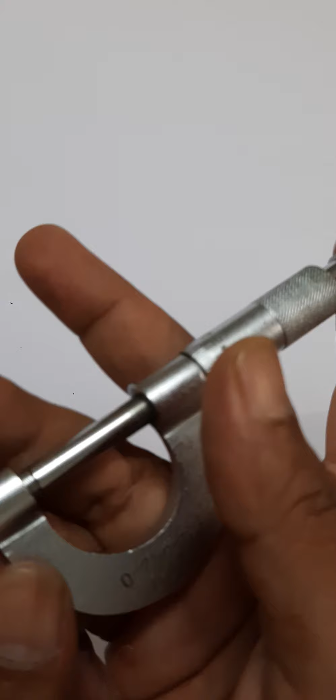This is an instrument known as the screw gauge instrument. Now you can see there is a scale which is in circular form: 0, 5, 10, 15, 20, 25, 30, 35, 40, 45, and then again 0, which means there are total 50 divisions on the circle. So this is called the circular scale of the screw gauge.

A linear scale is also present, but that I will show you. If I rotate it, you will find a gap here, and then a linear scale will appear in front of you. So I start rotating it in the anti-clockwise direction. Yes, I rotate it, and when I rotate it, you will see a scale visible to you, along with a gap here. So now you can see this scale, and we call it a linear scale.

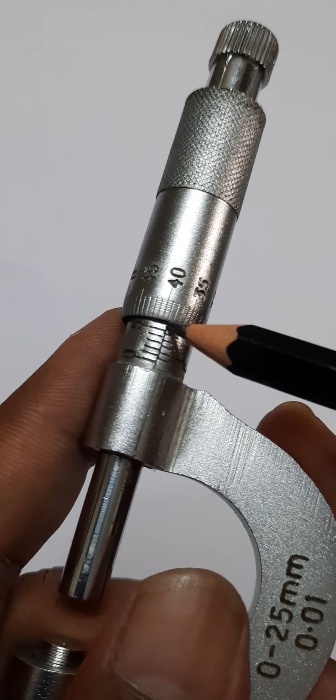This scale is known as linear scale, and this scale is called the circular scale, which has 50 divisions. On your linear scale you can see a line, this line, which we call the reference line. You can see divisions 0, 1, 2, 3, 4, and this is 5. So these are 5 millimeters. One gap is 1 millimeter.

On the bottom side also there are divisions, but these divisions are at the halfway point. I mean, if it is 0 and then 1 millimeter, the bottom side division is exactly at the mid of 0 and 1 millimeter, or you can say it is at 0.5 millimeter, then 1.5 millimeter, and 2.5 millimeter. So from this linear scale you can take readings up to 0.5 millimeter. That is the resolution of the linear scale.

Now there are some definitions associated with this scale: number one, what is the pitch of the instrument, and then what is the least count of the instrument, and how to take reading from this instrument. Okay, so I will show you.

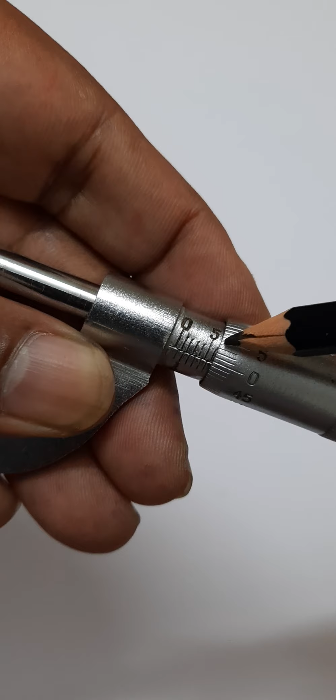First I will set the 0 of the circular scale on the linear scale, on the reference line, and in this case I can see that the number visible on the linear scale is 6 millimeter. The number visible on the linear scale is 5, and after that one more division is visible, so you can see 6 millimeter on the linear scale.

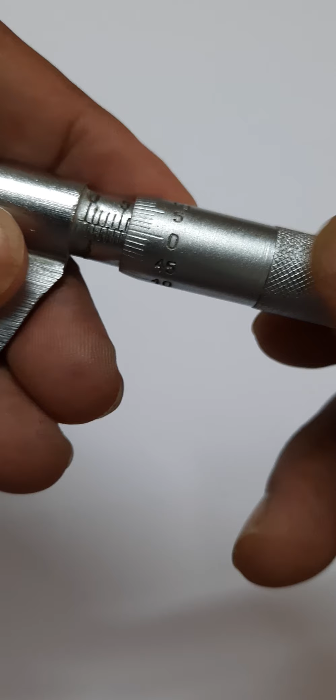And 0 is on the reference line. Now I will rotate this circular scale by 360 degrees, that is one turn. Okay, here I go, I will make one full rotation. The circular scale will be rotated for one complete turn. So I rotated it by one turn. I will rotate it by one more turn. So I rotated the circular scale twice, 2 turns, and after 2 turns now I can see 7 millimeter on the linear scale.

Before 2 rotations I was able to see 6 millimeter, and now 7 millimeter, which means during 2 rotations of the circular scale your linear scale has increased by 1 millimeter. During 2 rotations of the circular scale, the linear scale moves, or it is open, by 1 more millimeter.

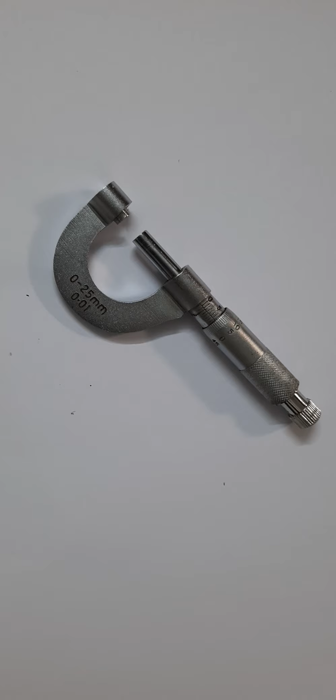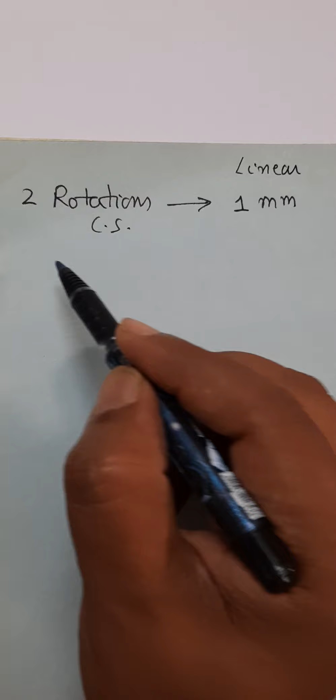So during two rotations of the circular scale, if your linear scale increases by 1 millimeter, then it means that during one rotation of the circular scale, it is very simple unitary mathematics: for two rotations of the circular scale, the linear scale increases by 1 millimeter, and therefore one rotation of the circular scale will make a 0.5 millimeter increment in the linear scale.

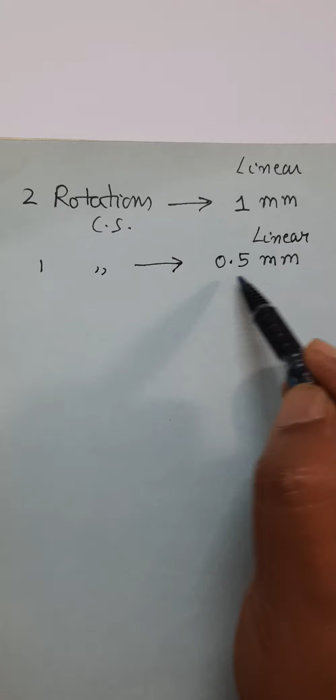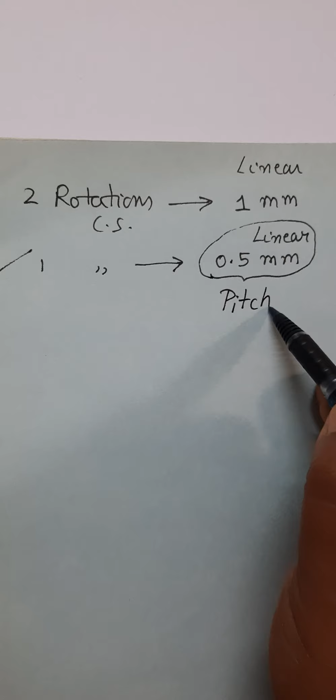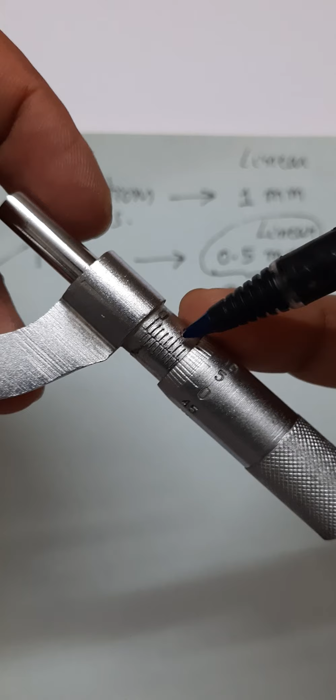So how much is the increment in linear scale reading due to one complete rotation of the circular scale? This is called the pitch of that scale. Means if you rotate it one turn, some length will increase on the linear scale. How much length on the linear scale increases by one rotation of the circular scale is known as pitch.

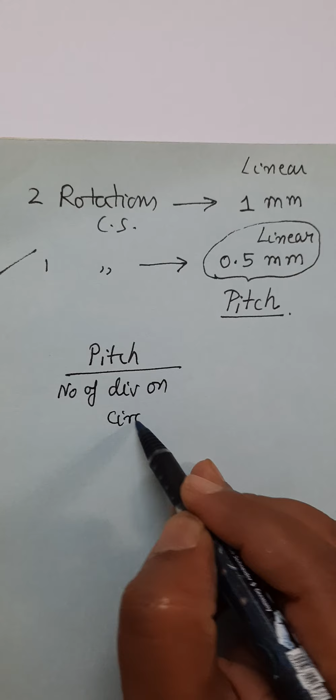And when you divide that pitch by the total number of divisions on the circular scale, you get the least count of that instrument.

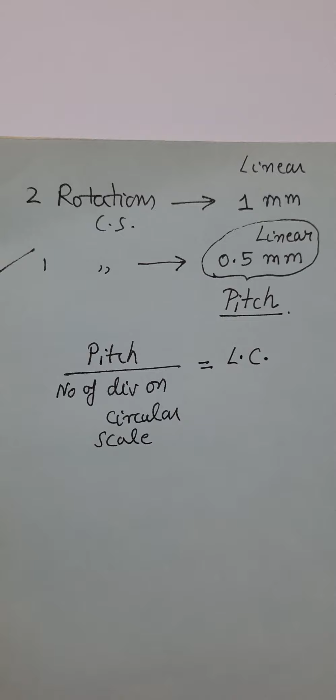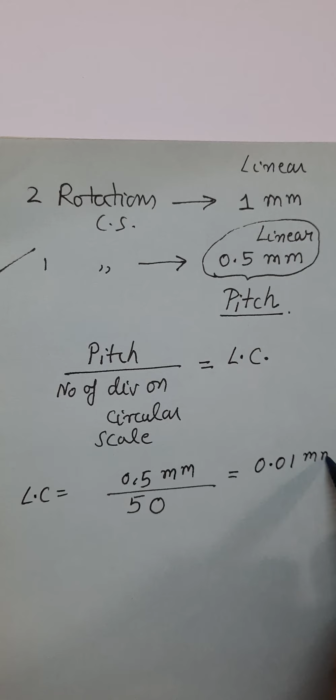For my instrument, I have 50 divisions on the circular scale, and the pitch is 0.5 millimeter. So 0.5 millimeter pitch divided by the number of divisions on the circular scale, which are 50, gives the least count for my instrument, which is 0.01 millimeter, or I can say it is 0.001 centimeter.

So now you can see that measurements are accurate or precise up to 3 places of decimal. This is how we define the least count of a circular scale screw gauge. Now I will show you how to take the reading from such a scale.

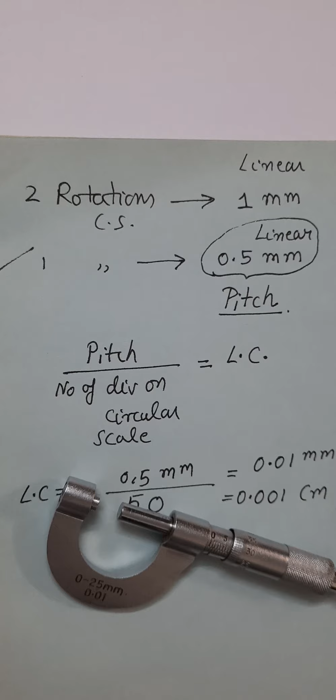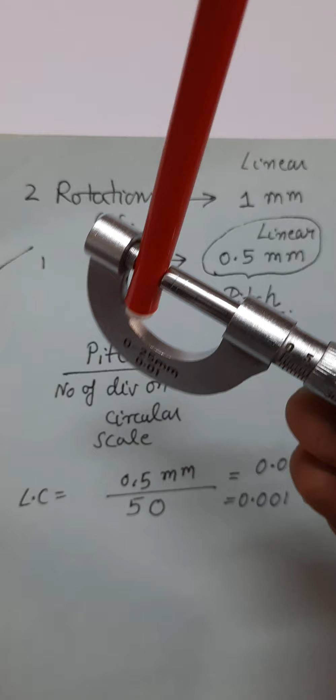Suppose I want the diameter of this sketch pen. So what I will do is fix the pen tightly between the gap.

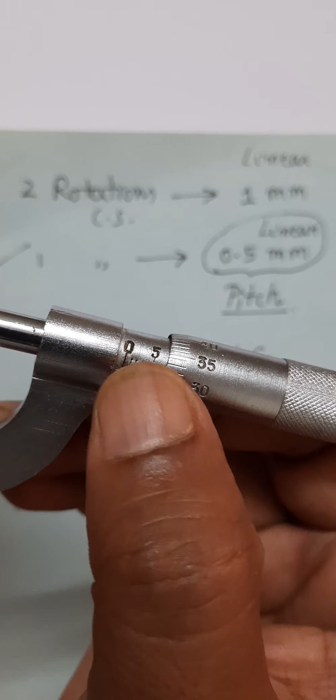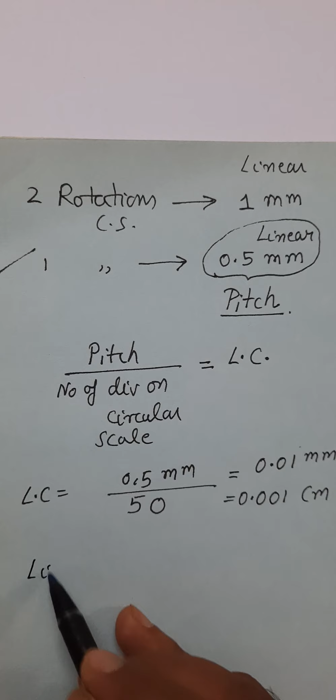So the pen is now fixed between the gap, and in this condition you have to read on the linear scale. If you read it carefully, I can see 7 divisions on the linear scale. With the object in this gap, you can see 7 divisions, and that is called the linear scale reading, which is 7 millimeters, because one division is 1 millimeter.

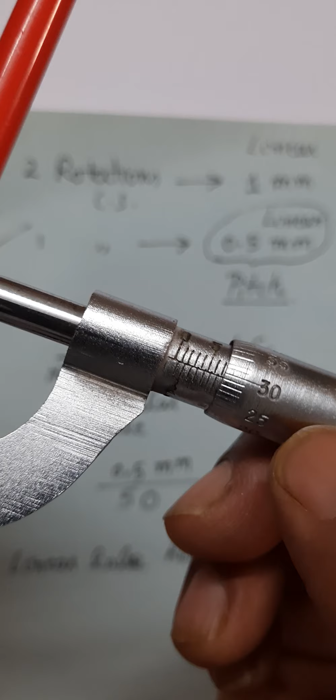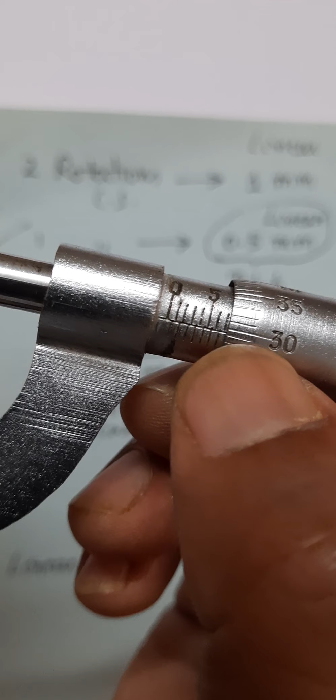Now you have to check which division of the circular scale is on the reference line. If you look, the 29th division is collinear with the reference line of the linear scale, almost coinciding. So you have to always look for the division on the circular scale which coincides with the line on the linear scale, which is 29, or you can say 30. That will give you the circular scale reading.

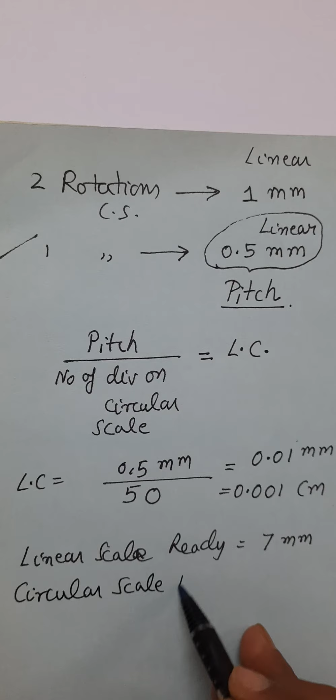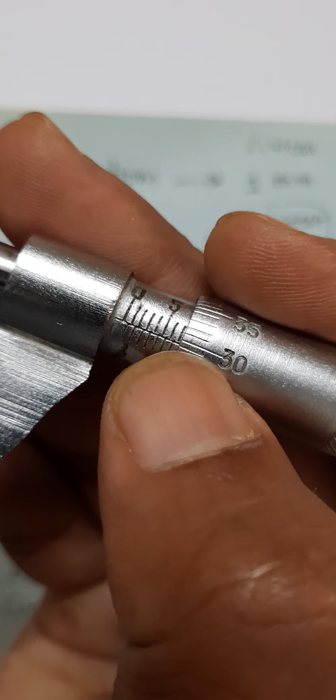I repeat, I will show you again. The 29th division of the circular scale is on this line. So you have to check which division of the circular scale coincides with the reference line, and simply multiply that by the least count.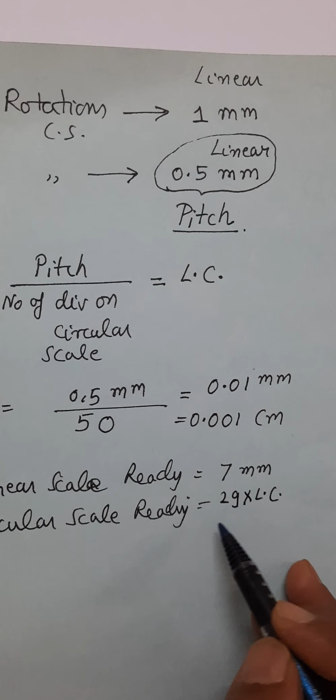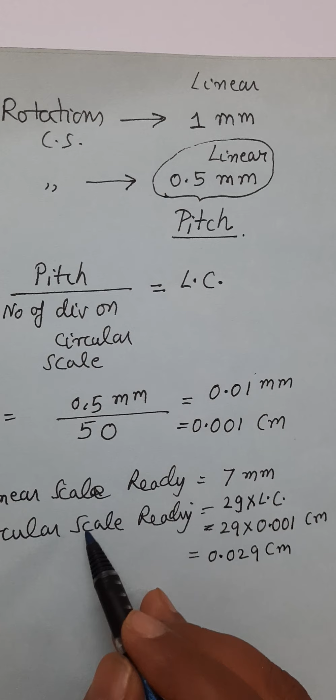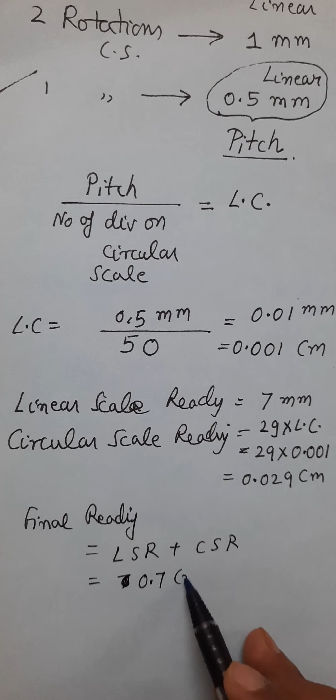So this is 29, and the least count is 0.001 centimeter, so it is 0.029 centimeter. Now you have to add these two readings. So the final reading by this instrument will be the linear scale reading plus circular scale reading, which means 7 millimeter, which is 0.7 centimeter, plus 0.029 centimeter, which is 0.729 centimeter.

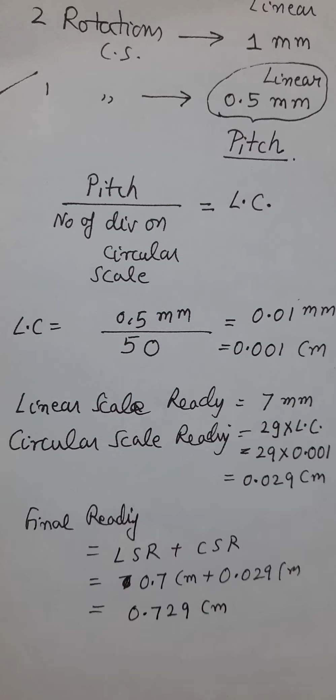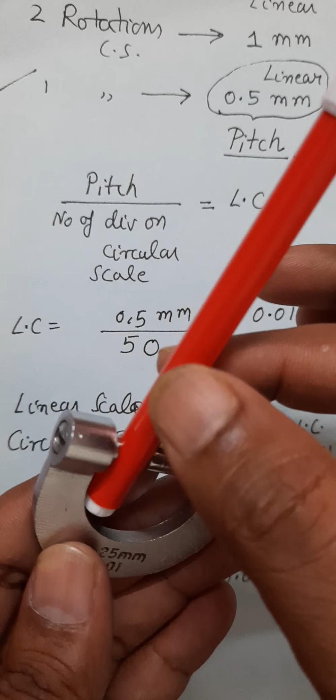So 0.729 centimeter is the diameter of the sketch pen, because by putting the sketch pen in this gap you will always measure the diameter of this instrument. So the diameter of this sketch pen is 0.729 centimeter. Divide it by 2 and you get the radius of the sketch pen.

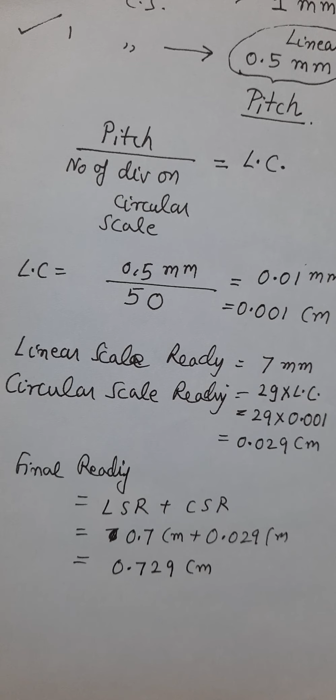So this is how you take a reading from the screw gauge, and in the previous video I demonstrated how to take the reading from the vernier caliper. I hope that taking readings from these two instruments is clear to you, and you can apply them in your JEE numericals or board numericals.